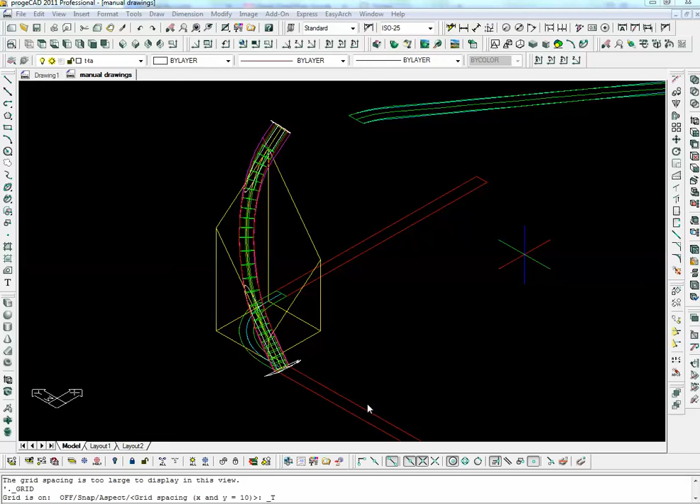The first thing to do is to isolate the different elements that we need in the drawing so that we don't have everything cluttering up the screen. So the best thing to do is just isolate the different layers, turn on the different layers. We want the prism layer, of course. Let's get rid of all the rest. Get rid of these ones here. We want the handrail plan, tangent handrail plan here,

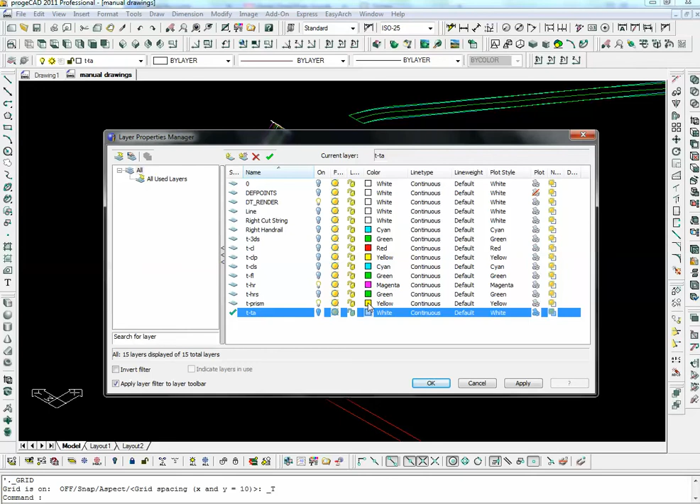and that's about all. In fact, really, the prism layer is actually yellow here, but as we're going to be printing it, we're going to be working in paper space, which is the printing mode, and it'd be white. So let's put it a different colour so that it looks better on the white.

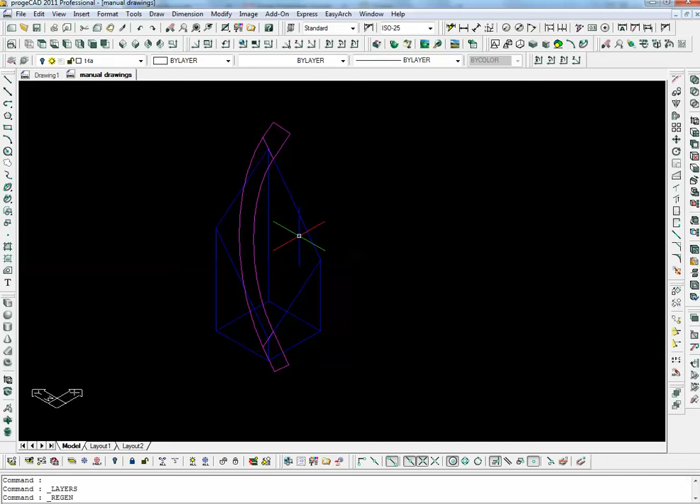Switch off. Right, now here we have the face mould as it's moving up across the tangent plane, which is this sort of diamond shape here, and we're going to go into what we call paper space, the printing mode, and set that up for printing full size. To do that, we go into one of these tabs, layout, and we're in printing mode.

The first thing in the printing mode, which comes up with a bit of paper and what they call a window on the bit of paper we're looking at the model through, is to make sure that it's set up for the right size paper. To do that, you go into print setup. In print setup, you choose your printer and you choose the size of the paper that you're going to use.

Let's see what we need. We'll try the big size first, an A0. I don't really know how big we're going to need it, but A0 is the biggest I have here, so let's use an A0 size. And we go into scale and we make sure that we're printing in millimeters, being French, so millimeters here. Print scale is always at 1 when we're using paper space. You always keep 1 to 1 in the print scale here.

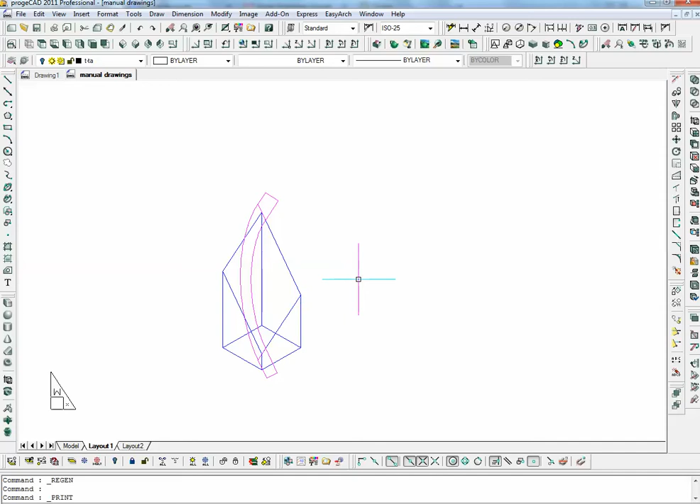And let's have a look at the advanced, and we make sure that we're centered on the page in the advanced options. That's the main thing. And then we click here, apply to layout, and we exit, and that's print setup. Now, if we zoom back, we see the UCS icon here is the paper space icon, which means that we're working in the print space and not

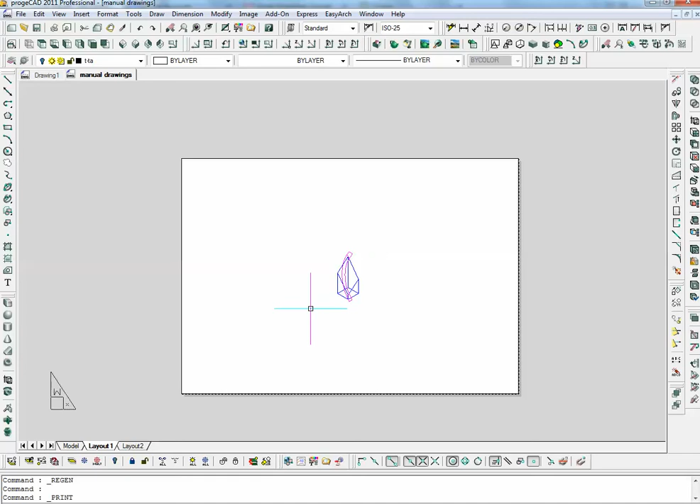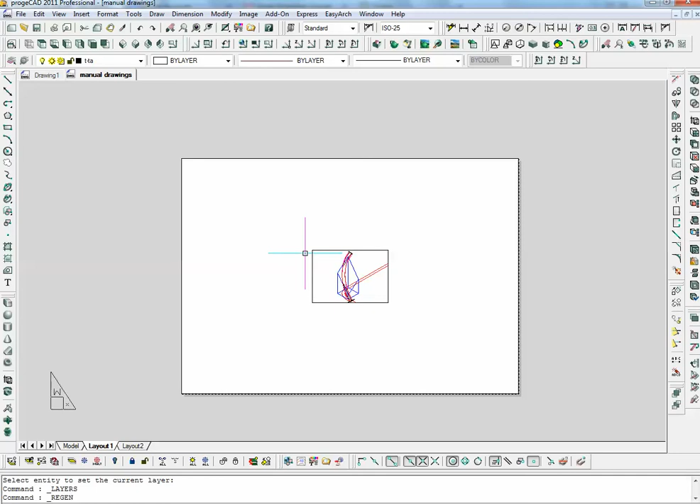in the model. Now, one thing we're missing here is the actual window that we're looking at the model through. I'm not quite sure which layer it's on. I think it's on line. Let's have a look if it's on line. It's not on line. Maybe it's on 0, or this. Right. It's actually on the TTA layer. That's the window that we're looking at the model through.

We're going to extend that window. We have now the paper size, which is A0 here. The window has been actually drawn for the A4 because my standard printer is an A4 printer. I want to print this one on A0 so we get the right size. We stretch the window while in paper space. We stretch the window to fit the paper.

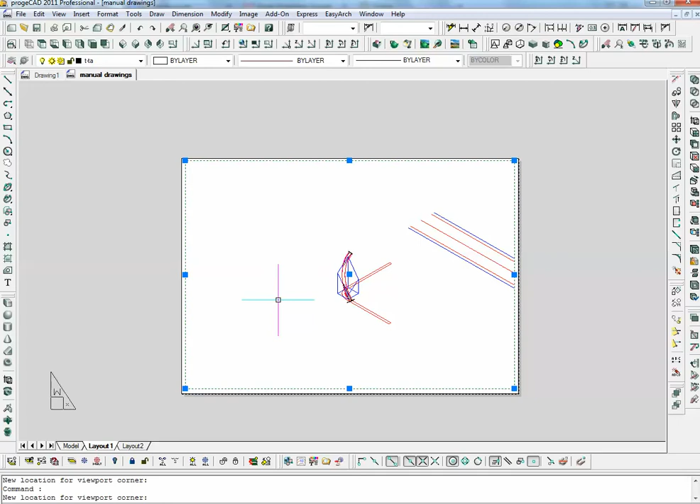Once the window is fitting the paper, we click twice onto the paper, and we end up inside the paper looking at the model. We're in the model space working on it. Now what we want to do here is get rid of all the other layers that we don't need. Oh, sorry, I don't need all those, and we just want the TTA.

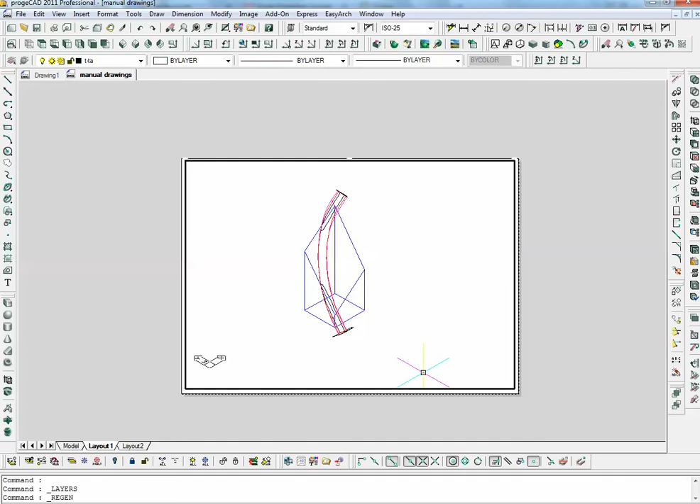Okay, so we just got this. Oh yeah, we're going to take off TTA as well, because in fact, I didn't realise that the window was on the TTA, but TTA is the tangent angles, twist angles.

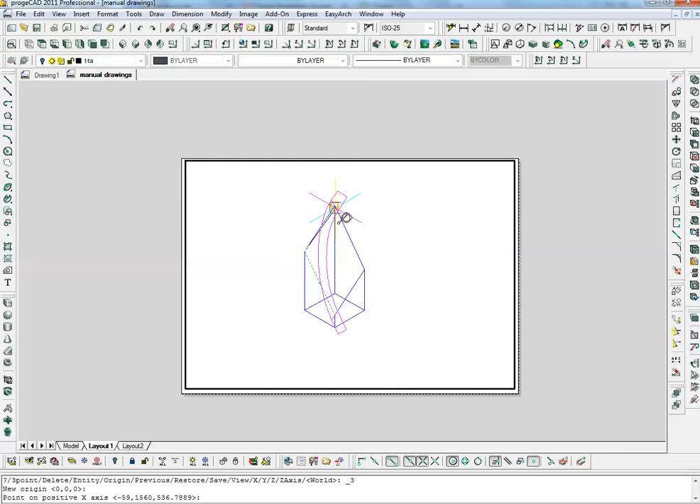Okay, go back to the model here. Now we've got the set up on the paper. We're in the model space here. We go click into the window, and we get to see the model. And now what we want to do is to put the UCS here onto the tangent plane. So let's align it with the tangent plane by clicking here 3-point UCS, and I click the origin here. I click to the end point of the prism, and now the UCS, you see, is aligned with the end point with the tangent plane here.

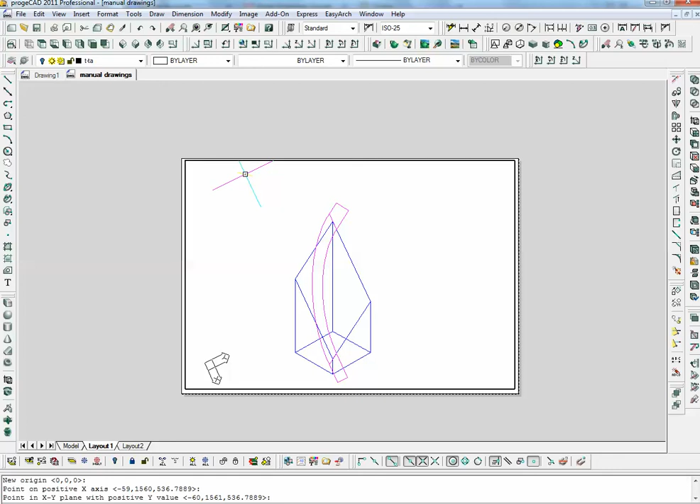Let's now get the view aligned to the UCS so that we're looking directly from the top at right angles to the tangent plane, so we get the real shape of this, not a 3D projection of it. To do that, it's very simple. We go to View, and we take 3D View, and we choose Plan View, Current UCS, so the view will be aligned to the current UCS.

Now, here we have the real projection, the front-on projection of the face mould, and this is the real shape, but it's not yet scaled to 1:1 full size for the printing. To scale it to the 1:1 full size, I use the zoom command. I'm going to use my keyboard, which is the easiest way to do it. So if we look down here, we can see the command line, and I just type Z.

Oh, sorry, you can't see the command line exactly. Hang on. The video is being cut off on the command line, doesn't matter. You type Z and you enter for the zoom command. And here we have the zoom command here. And then I simply type in this.

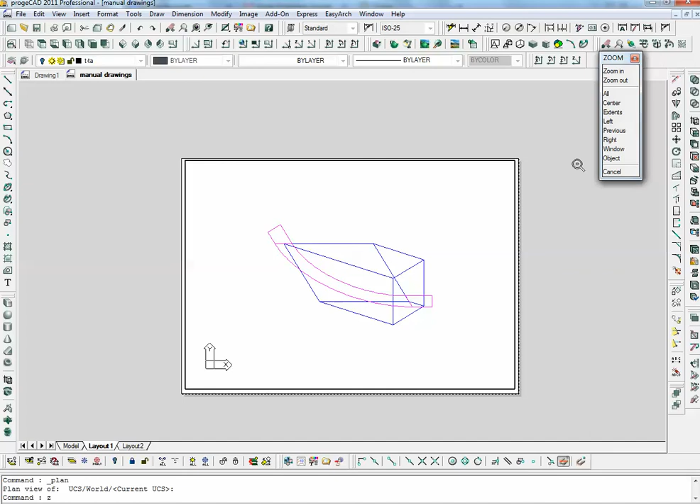I type in the zoom factor of 1, and after 1, I type XP. So 1 XP, which means in fact a printing scale of 1:1 relative to the paper that I'm using. Now I take 1 XP. The drawing is scaled on the paper and full size.

Now, this is the printout that I need. We can see here, this fits quite well onto my A0 paper. So we could probably make it a bit smaller, but this is okay. This is the basics. And so this is my actual shape of the face mould.

Now to print it, I must be careful if I'm using ProgeCAD. AutoCAD is a bit more forgiving, but with ProgeCAD, I have to be sure. I go out of the window, now the window is no longer active. I'm no longer in the model space. The icon becomes this triangle icon here, and it shows that I'm in the paper printing mode and not in the model mode. And now I can print.

Now if I print, I can open the print dialog, and I can just click print, and this will print it out as full size. I could actually print it, in fact, hang on, because it's a PDF printer, so this is going to give you a PDF file that I can give to somebody else. Let's put it into the right folder. There.

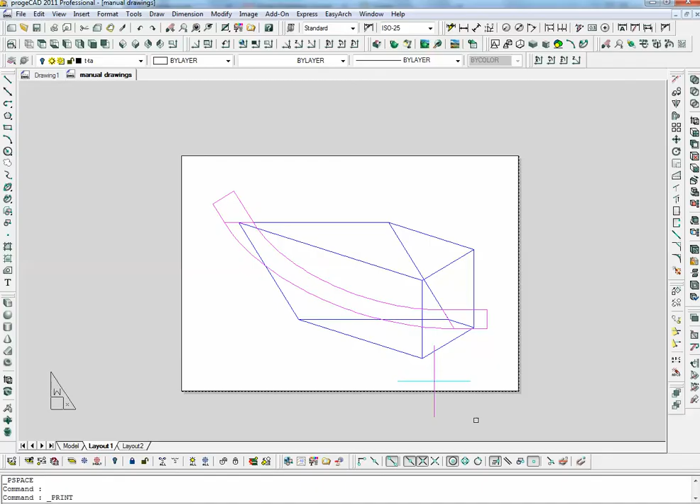Now let's see what it gives in the PDF reader. And here we have the PDF that will be printed out full size. If you take this PDF and you put it on a printer or on a plotter, it will print out this shape on the A0. And you can just cut that out and glue it on a bit of plywood, and it will give you the face mould with your springing lines here to be used for your tangent handrailing.